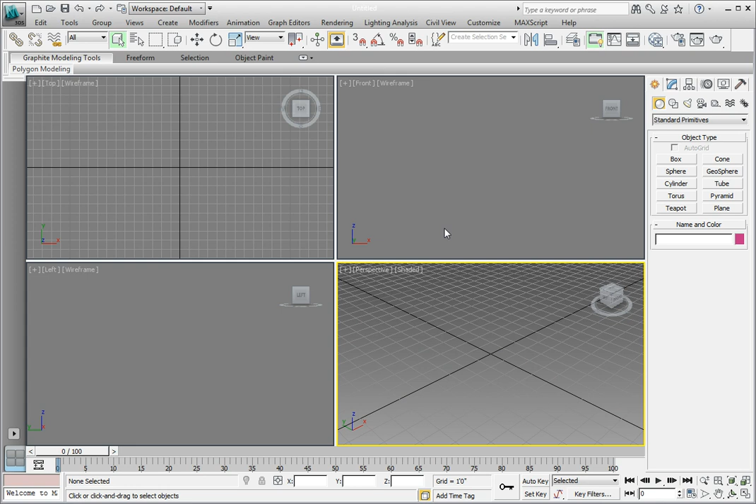In this lesson, we're going to open a file and render it using the iRay renderer. From the Quick Access toolbar, click Open, navigate to the Chapter 6 subdirectory, and open the file Chapter 6 iRay01.max. Let's take a quick look at what's going on in this file.

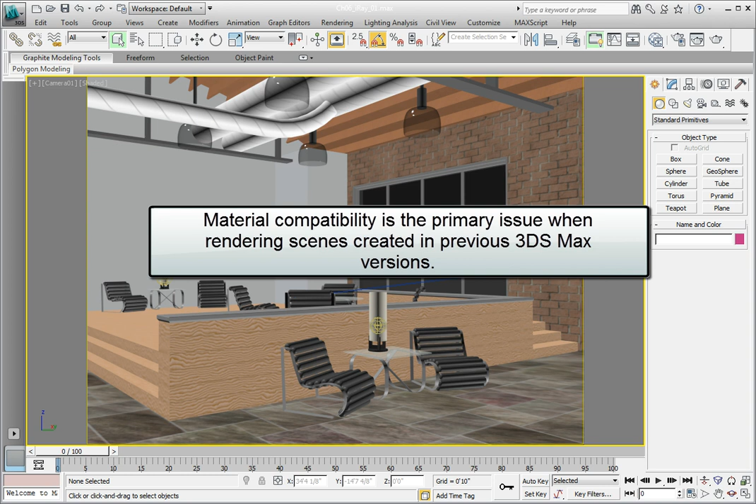While iRay is a very high-quality renderer, there are some things you need to be familiar with if you're going to create scenes in order to be rendered with iRay. Material compatibility is the primary issue you're going to encounter when rendering scenes created in previous versions of 3ds Max. iRay is not 100% compatible with all of the 3ds Max material types.

And as a good rule of thumb, keep your materials to either the Arch and Design material or one of the materials in the Autodesk material library. The same thing goes for certain maps. For example, iRay is not compatible with the composite map. However, iRay is compatible with substance textures and the other procedural textures available within 3ds Max.

This is a basic scene. It consists of a daylight system for exterior lighting, and we're using two mental ray portal lights in front of the two large windows. There are also two lights located in the scene that are just there as effect lights and don't really contribute to the overall illumination of the scene. The current renderer is set to use mental ray for rendering the scene.

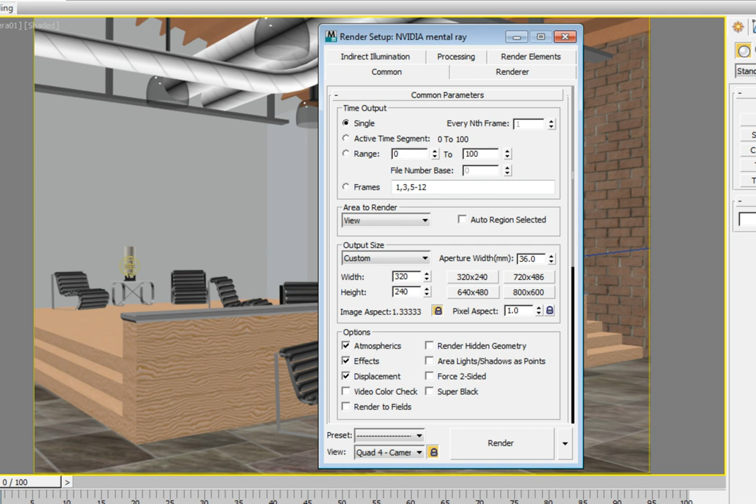From the main toolbar, click on the Render Setup button to open the Render Setup dialog. Go ahead and click on the Common tab in order to open the Common panel. In the Common panel, scroll to the Assign Renderer rollout. If it's not already open, go ahead and open it. We want to change the production renderer from mental ray to iRay.

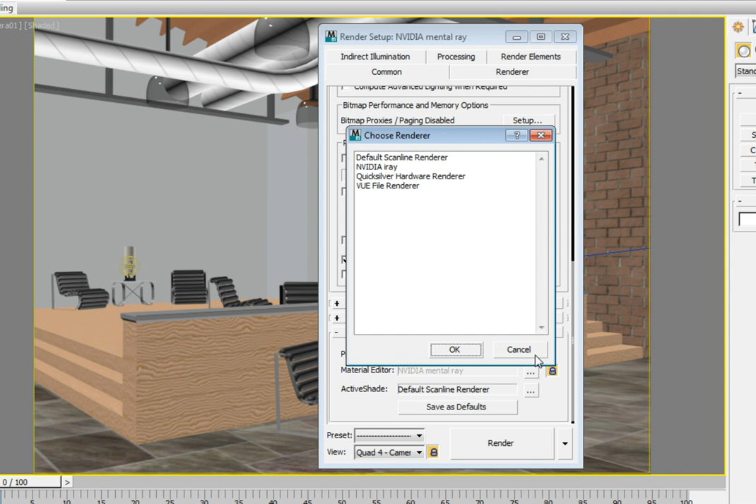In the Assign Renderer rollout, click on the Production Render option. In the Choose Renderer dialog, click the iRay renderer and then click OK. The first thing you'll notice is that there is only one other tab now available in the Render Setup dialog. Click on the Renderer tab to expose the iRay Render Setup options. We're going to concentrate only on the iRay rollout.

The only adjustment that needs to be made is the render duration per frame. There are three ways to adjust the amount of time you will allow for the frame to render. Keep in mind that this renderer is unlike the mental ray renderer. iRay renders a complete frame from the very beginning of the rendering, and over time fills in the rendering and continues to generate higher and higher quality images. The longer you let iRay render, the better quality image you'll end up with.

Let's set the time to 2 minutes. That way we don't take very long to render this scene. If you want to later, you can let the frame render as long as you want in order to see a higher quality image. In the time option, change the minutes value to 2 and then press Enter. Make sure the view you're rendering is set to camera 1. Then click Render to render the frame.

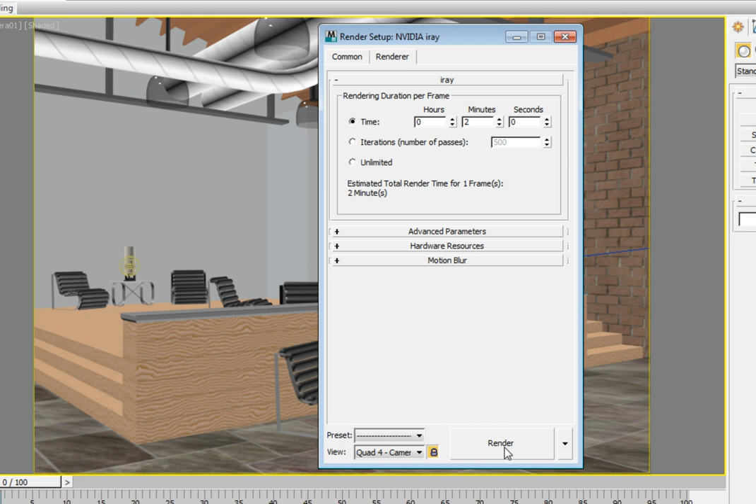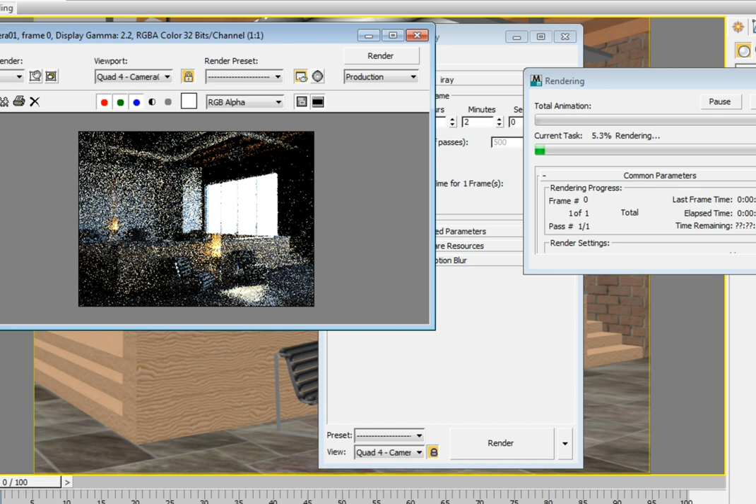As the frame renders, you'll notice that it starts out very grainy and slowly begins to fill in with more detail and more subtle coloring. It's important to notice, however, that the final image is rendered in one instance, unlike mental ray, which must first calculate the global illumination before it renders the final image.

After 2 minutes of rendering, you can see that we have a nice rendering and our environment looks pretty photorealistic. You can also notice that the image is still very grainy due to the fact that we only rendered this for 2 minutes. Again, the longer we let iRay render, the higher quality finished image we'll get.

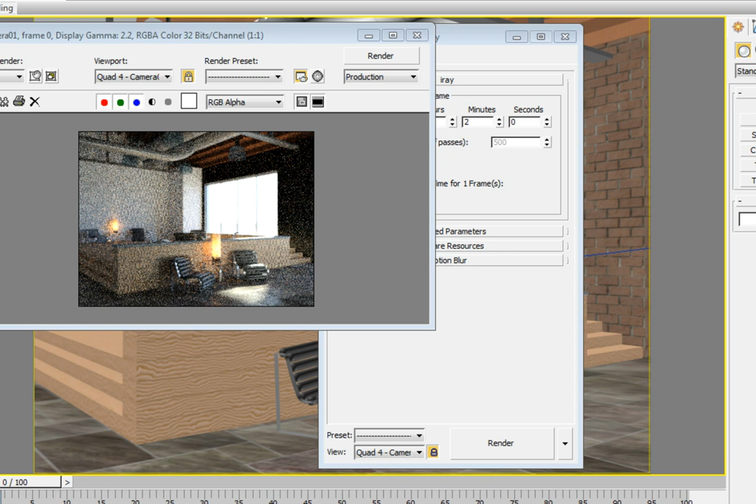Go ahead and close the render frame window and close the Render Setup dialog. If you want to save this file incrementally, go ahead and save the file. Otherwise, press Ctrl+S on the keyboard to save the current working file.